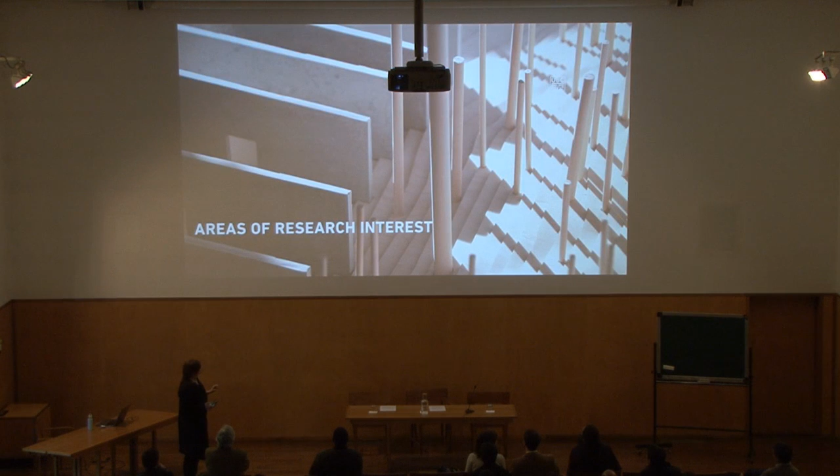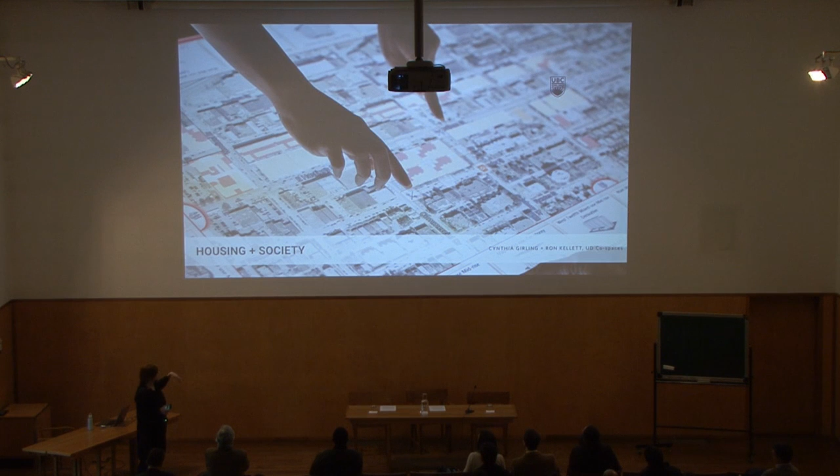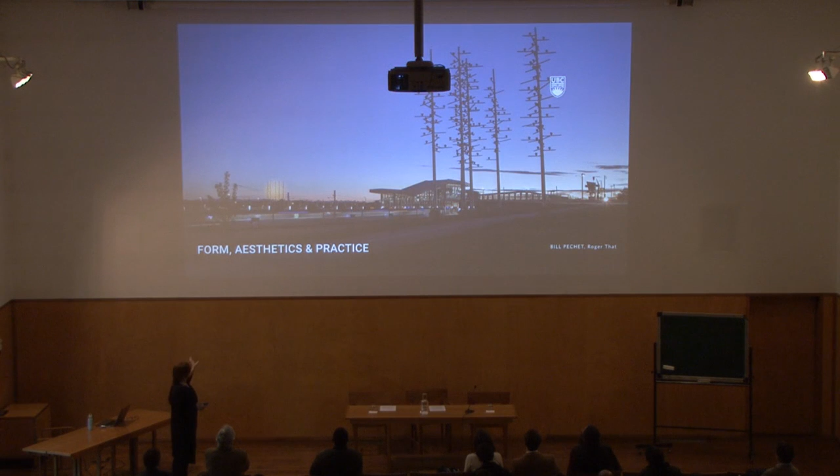Our research areas that are of interest generally are housing and society. So when we look at housing generally, and I'm sure that you guys have kind of similar research areas, it seems like. We have form, aesthetics, and practice. This is showing you an installation from Matthew Sewells, who was growing a landscape that is reversed. We have Bill Pechet, he's one of our contemporary architect artists who does a lot of public space design and installation, and he's always working around infrastructure.

And then we have design and construction futures, which is more the area that I am talking about today. This one here is a different project by Joe Dahmen, who is looking at constructing out of natural growing materials. In this case, it's a mushroom. It's a bit similar to your cork, except that in this case it's actually growing.

And then we have Blair Satterfield, who might also be interested in it. He's another one who works sometimes in wood. He's also interested in looking at waste products and how you can reuse those waste products. So his view on the wood in this research was about how to reuse the wood that comes from houses that decay down. And so right here, he's looking at a process of fabricating that zippers the wood into different types of shapes.

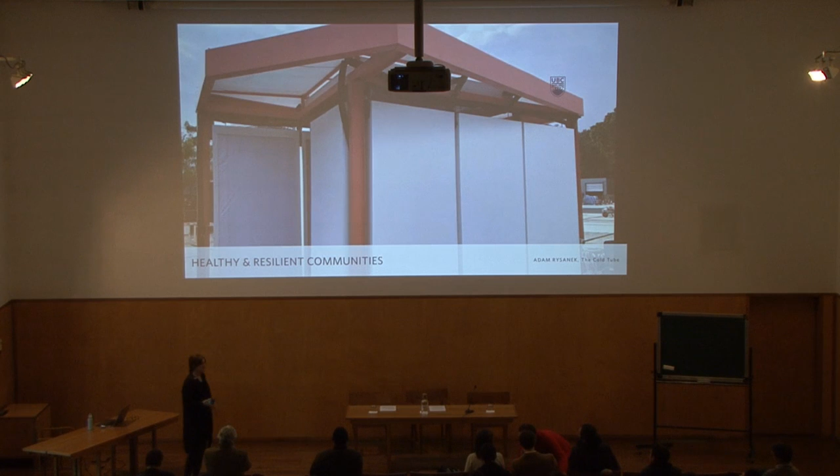And then we have healthy and resilient communities. Adam Rysanek that this is looking at more environmental controls. His research here is looking at radiant cooling through running cool pipes through walls. So you don't have to use air conditioning, you can reduce energy use by running cold water through walls and having the radiant cooling affect the space. So that might also be relevant where it's hot. Not so relevant in Vancouver, but he was working in Singapore at ETH prior to that.

We also have Kees Lokman, who's looking more at living breakwaters and dealing with water control with climate change through natural processes in landscape. And he's from our landscape architecture side.

So generally, when we look at how we go about doing this work, we focus a lot on collaboration. So we have a lot of collaboration with other faculties and other parts of the school, which I think is relatively suitable for architecture and environmental design schools. And then we have collaboration in terms of landscape and architecture, where we even offer a dual degree where you can do a master's in architecture and a master's in landscape architecture together.

So, is this working? It's not that we can. Yeah, now it's working. Okay. Can you hear me now?

Okay. So the collaboration is, we collaborate outside in other disciplines, but also within our school, we have the architecture and landscape architecture together. And so this is a project that is being done by both students, both working together.

We also have a lot of community, we work in the community. This is an installation of our undergraduate students. They created a big board and everyone gets to go and put on sushi costumes and lie on the board as a kind of fun public installation. It was a competition that they won for the local festival. And so that was fun.

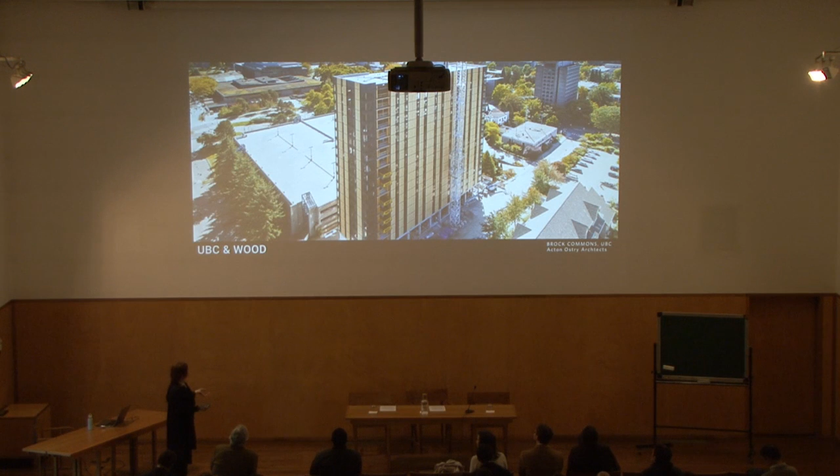This building was built to prove that it could be done, and it was built very quickly and very inexpensively to make the case that you can build these buildings in wood. For this building, we didn't challenge the codes because we wanted to do it quickly. So in the future, when the codes evolve a little bit more, there'll be more aspects of the building that could be wood, right? The core, and you could expose more of the interior wood. Right now, it's mostly covered with drywall.

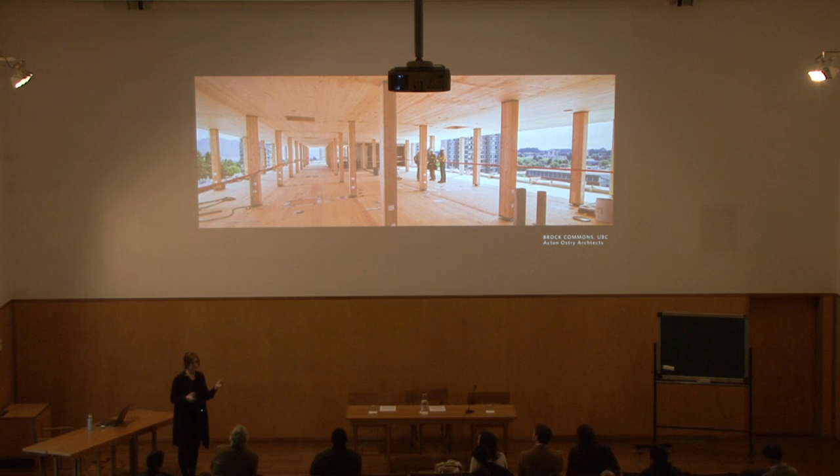So our codes are, I think, more suited to building in wood, but in terms of these tall wood buildings, it's still experimental. And so we are doing it at the university as an experiment. Now that we've proven that it can be done, it can be taken elsewhere in Canada and also in the city. Right now, the limit on wood buildings is 6 stories in Canada. And that's mostly light wood frame, if you're familiar with the light wood frame system.

So in our region, there's a long history of building in wood, especially in architecture, looking at regionalism and modernism, if you're familiar with that movement. The idea was that they were modernists building in specific regions. One of our most famous architects who built in this style was Arthur Erickson.

It's 5 degrees in the winter in this area and then maybe 25 degrees in the summer. The code does not allow this anymore, but this is kind of the history of architecture in our region. And so nowadays we have more innovative work going on in this region probably than any other region in Canada.

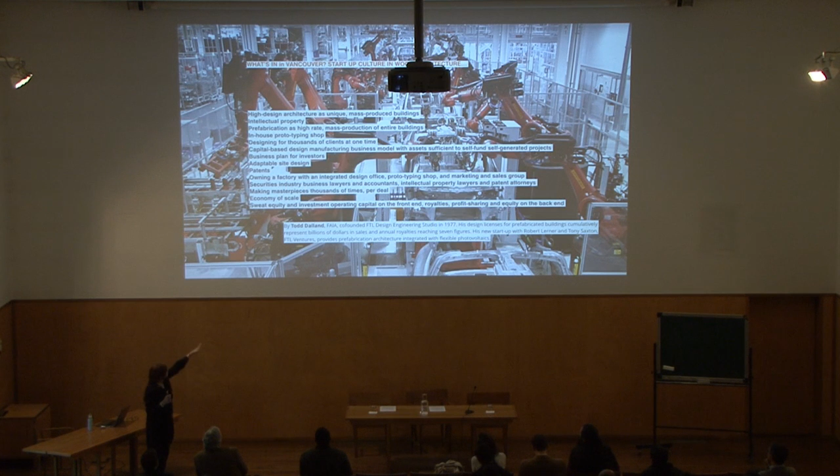But when you look at Todd Dalland, and he's looking at what is hip now in architecture, it is this kind of prefabrication, designing mass housing, owning a factory, integrated design office, prototyping shop, and marketing and sales, securities, industry, business, lawyers, and accountants, intellectual property, and patents. This is all integrated because you're designing the whole fabrication system. So this is, as I say, what seems to be up and coming in Vancouver.

Also in Toronto, if you've heard of this project, this is Google's Sidewalk Labs. It's an extremely high profile project in Canada. It's highly contested because of the privacy issues. But what they're proposing is that all of their housing will be prefabricated and more efficient. So the same idea as we saw previously, they're going to integrate the whole supply chain and make their prefabricated units and plug them in, and therefore housing is going to be cheaper and more affordable.

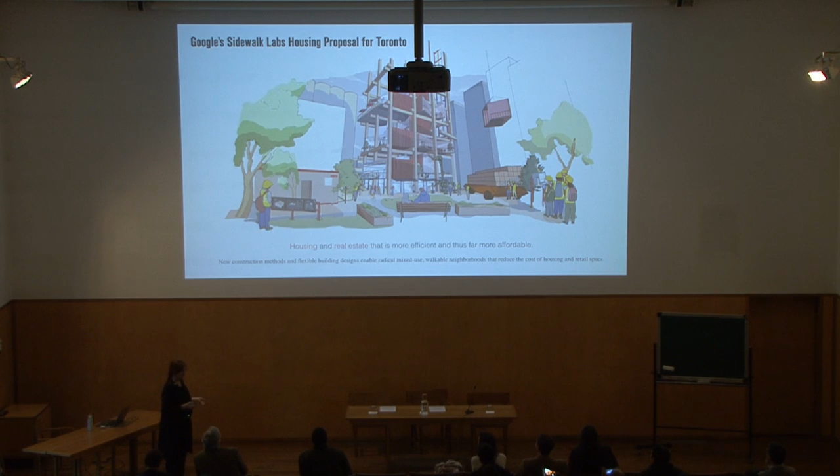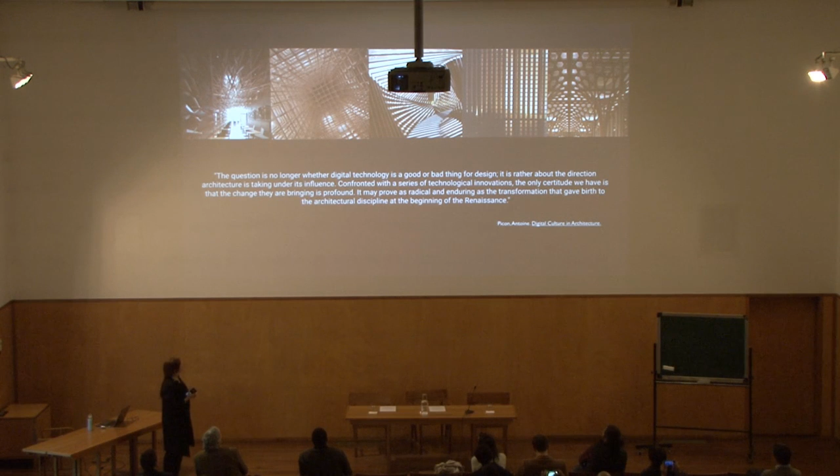So that brings us to this statement here. The question is no longer whether digital technology is a good or a bad thing for design. It is rather about the direction architecture is taking under its influence. Confronted with a series of technological innovations, the only certitude we have is that the change that they are bringing is profound. It may prove as radical and enduring as the transformation that gave birth to the architectural discipline at the beginning of the Renaissance.

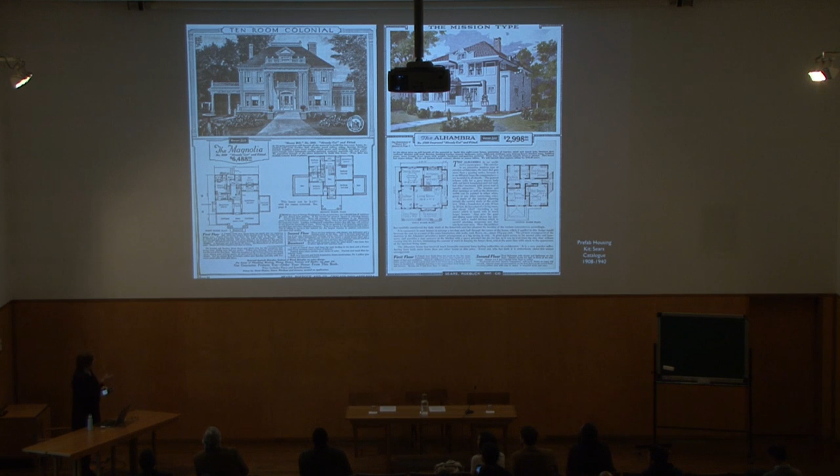And so my question in terms of what is happening is what kind of change this is bringing, and whether or not it will bring the utopian ideals to architecture. These are prefabricated houses that they sold in North America in 1908. So in the early stages of the 20th century, these were very popular because they didn't have enough labor. So they would ship the entire house, it was all wood, to site and build it on site. So this is not a new concept, but it went out of fashion because after World War II, labor came back to the country, and so they had labor and didn't need it. This was more for the settlers who came to Canada in the first place.

But when we think about what prefabricated housing could be now, we have a kind of robotic assembly process, and we have this idea that this technology is now going to influence what's going to happen in architecture. And so I think it's worth considering what that means for architecture and what that means for how architects operate.

The other thing that we might want to consider is the environment. So one of the other pressing issues that we need to deal with is the materials we use in the building and how sustainable those materials are. And that's where wood has a very large advantage because it's a renewable building material. So you replant a tree with the new seedlings, and in 50 to 100 years, you'll have another tree available for consumption. This is really key, and this can be sustainable if you do it with sustainable forest management practices. If you just take down every tree, that's not a sustainable practice. But if you replant the trees, then it's almost like you're farming trees. You keep using the material.

So in Canada, we have zero rate of deforestation right now. Anything that we harvest for trees, we replant. And this has been constant for several years.

We also, 94% of our forests are owned publicly, so they're owned by the government. And so the government has control over who can harvest, when, and how much can be harvested, and that they have to be replanted. So that gives us an ability to kind of think very long-term about how we're using the wood and how the forest is being harvested. And we say less than 1% of the amount of the forest in Canada is harvested every year and replanted.

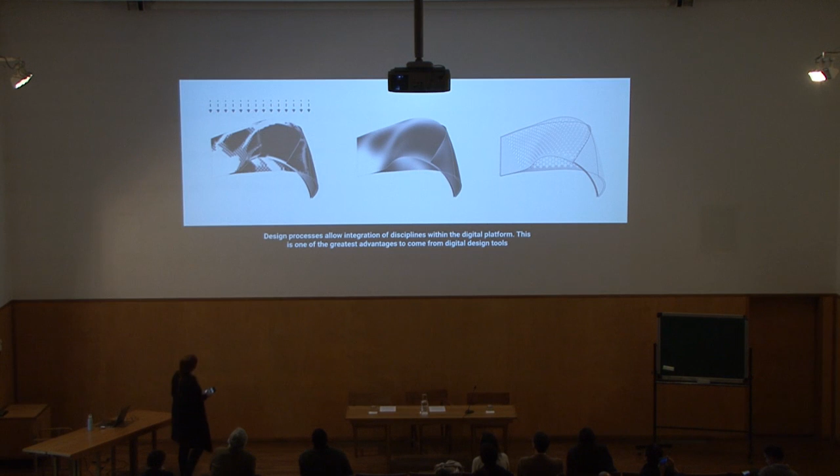So one of the greatest advantages of these digital tools is that we allow the integration of the disciplines to come together within the digital platform. And I think this is a really significant aspect. And that means that, and this is a quotation, the connection of digital fabrication and computation enables the immediate programming of production data and directly links the design with the making of architecture. As a result, the architect can fully control the construction process down to the smallest detail.

So this changes the role of what an architect does and who's fabricating, right? So when we think about it, we're drawing details, right? We're thinking about those details. In the case of these, we're also making the detail, right? If you are actually controlling the fabrication process, you are actually not just drawing anymore as an architect, you're actually building. So that means that it changes this kind of historic relationship we have with drawing, right? Especially when you're the one who is operating these systems.

So we have this kind of computer-aided design, finite element analysis, and computer-aided manufacturing that are now all playing a role in architecture. And I'm not talking too much about this in this lecture, but the analysis, when you have these very advanced tools, and I'd say that we're coming along in architecture, we haven't quite got there yet. But Grasshopper has an integration of environmental analysis and structural analysis coming within it. And so when we can integrate fully all these processes, then you collapse the disciplines, right? Then the disciplines all are working on the same software.

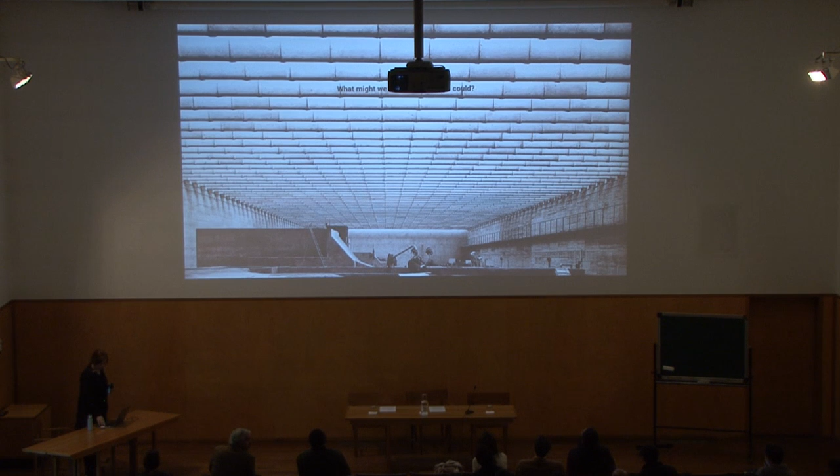And here's another project that we might think about with wood. What would this be like? This is a Toyo Ito Kakamigahara, excuse me if I pronounced that wrong, funeral home. It's kind of this undulating surface, this shell surface. But one of the interesting things to note about this is that this was originally built out of wood first. So in order to form the concrete, you had to build the wood structure. So my question is then, why would we build the concrete? Why don't we just build it out of wood? And so this is the formwork for that particular structure.

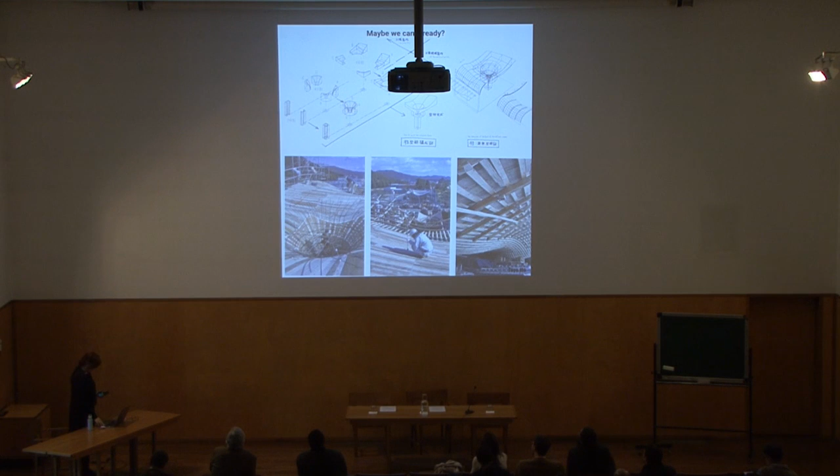So we have a group at UBC called the Wood Design Chair. It's a group of faculties, including the School of Architecture and Landscape Architecture, Wood Science, Civil Engineering, and the Center of Advanced Wood Processing. And we are together in this group that is the Wood Design Chair.

This particular research that I'm going to explain to you right now is done by myself, Ian McDonald, who was at Center of Advanced Wood Processing, Oliver Neumann at School of Architecture, Thomas Tannert, who's cross-appointed in Civil and Wood Science, and then our fantastic students who have now graduated.

And so the three kind of interesting forms that we're interested in looking at were all surface structures. So the idea of a surface to be the expression as well as the structure. And we looked at the folded plate, the ruled surface/lapped planes, and the double curved surfaces. So this was proof of concept research.

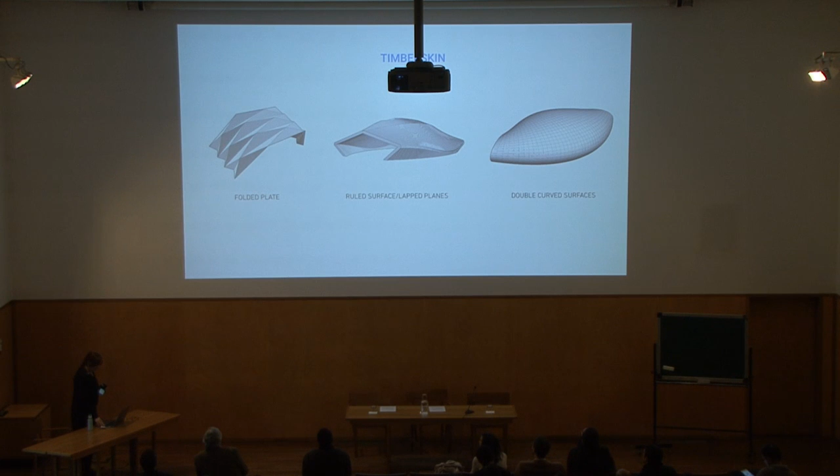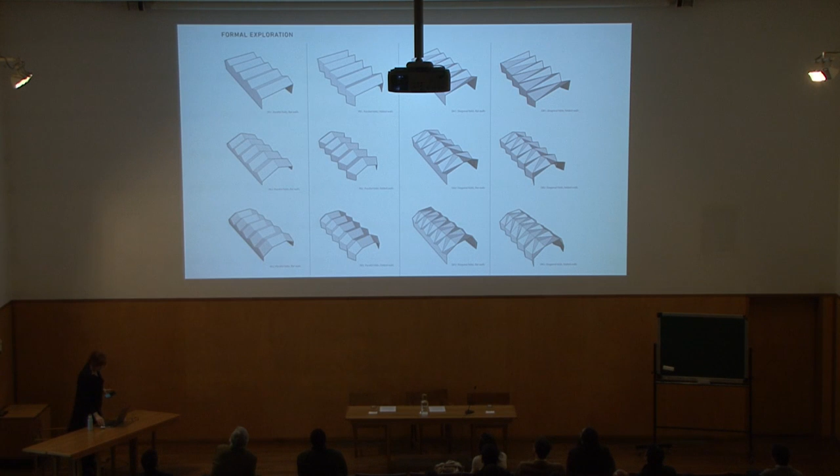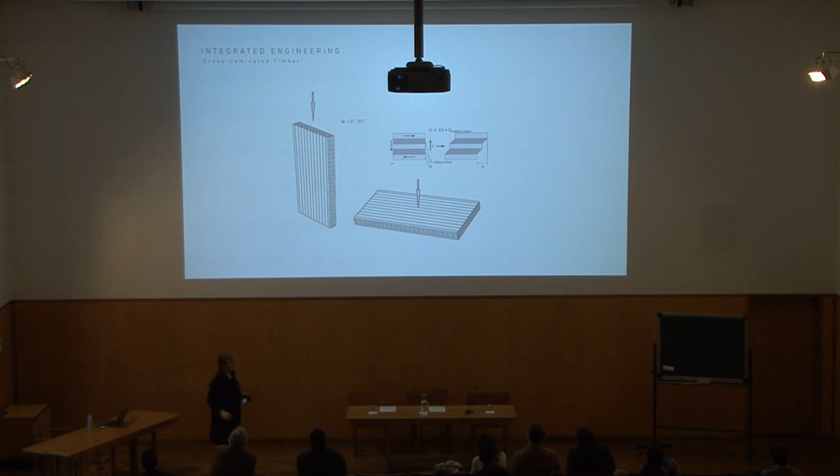And the material that we were looking at was our cross-laminated timber material. This is our engineer looking at it. We understand what the loading condition is in this case, and in this case, and what happens if we then change the loading to the form that we're interested in looking at.

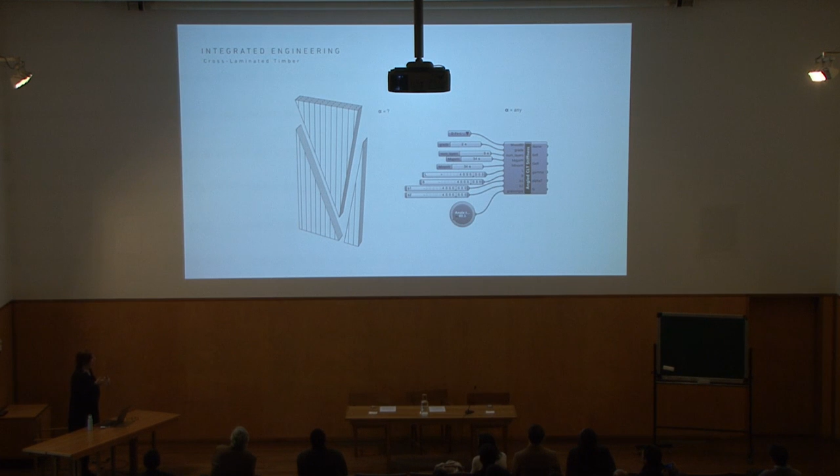So we cut our element, and this is an integrated process with Grasshopper. So what she was doing was trying to integrate the structural analysis with Grasshopper. And so the angles of the plates could then be taken to that.

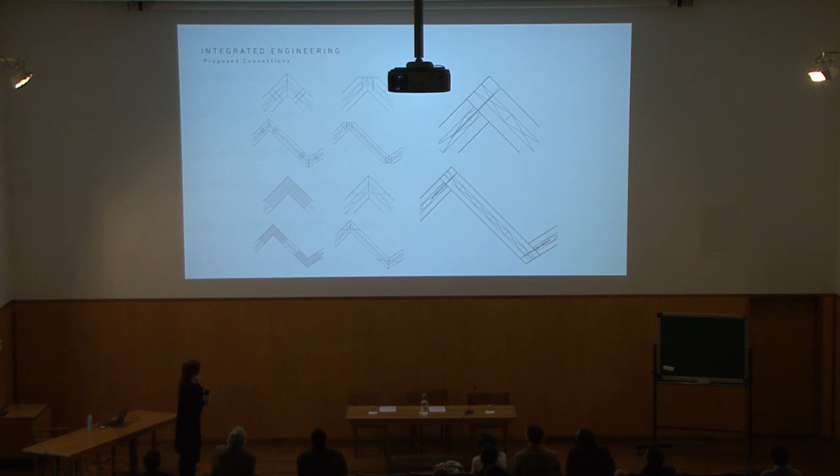And then we have the joints. So obviously, when you're looking at these kind of complex wood structures, one of the key aspects is how do you make the joint? So there are several investigations of how you could make the joint in these structures. In our case, we settled on the third joint here, which is self-tapping screws going diagonally into our elements.

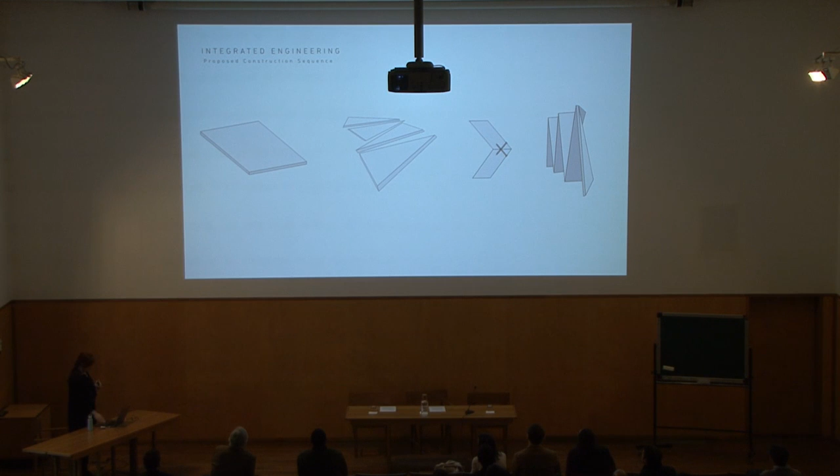So when you're looking at how these elements place together, what you want is some kind of notch that gives you the instructions for the fabrication within the actual build form itself, which is an emerging research area. When you actually use a robot, you can embed the instructions for fabrication within the pieces themselves so that they go together a lot faster. So that was something we learned from this particular installation.

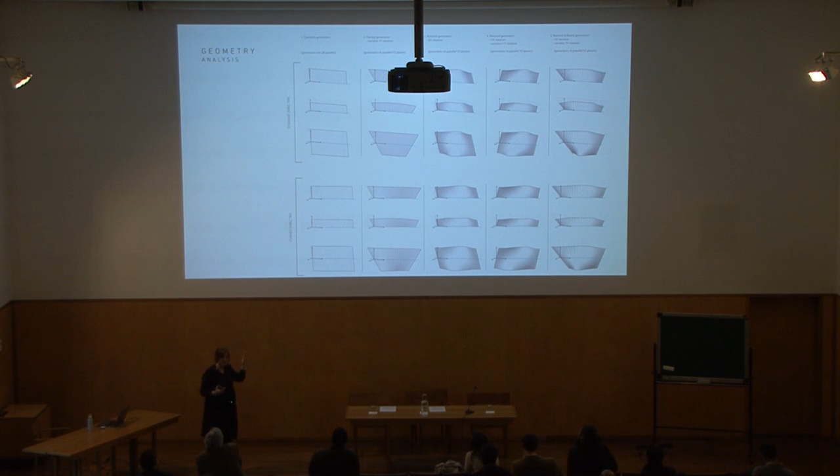But then you can use geometric complexity to change the angle of those plates relative to each other. So as you move that angle of what we call the directrix, then you allow more interesting forms that open up and are more steeply curved at the bottom. And so not only are you controlling this particular angle, but you're also controlling that angle. And you'd think, what can you do with a flat plate? But it turns out you can do a lot of things with a flat plate that we don't currently think of, because we usually think hierarchically about wood. So this started to get into the idea of what else can you do now.

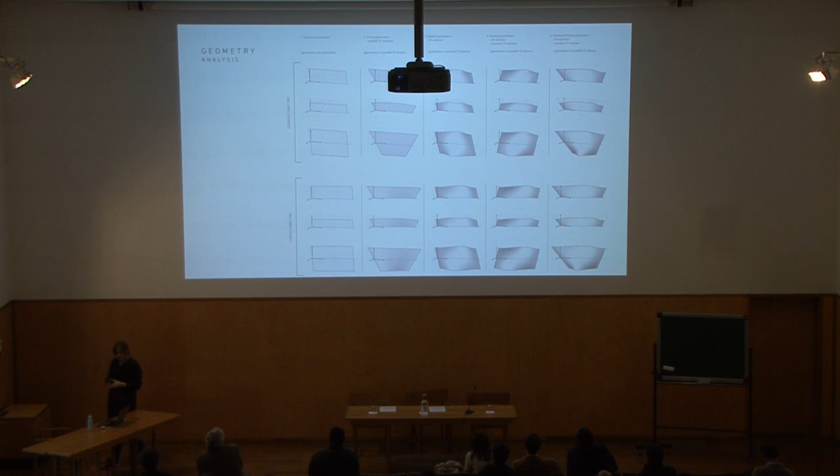We did this research before we had our industrial robot, but you can also angle the edges of those plates, right? And you can start to think about how you might make a more smooth surface just through cutting your plates at specific angles. So I think it opens up a bunch of questions really about what else you could do. I'm sure if you already use parametrics, you realize that as soon as you add one complexity and then another complexity, it very quickly gets out of control. So you have to try and limit the amount of complexity you add.

But here we can see one generating plan curve, right? So that means they have a plan curve on the base, and this is two generating plan curves. So we have a curve up here and a curve down here. And then you can have multiple generating plan curves as well. But architects might have an opinion about this, right? Because at some point it becomes chaotic. But anyways, all this is meant to do is to look at what the possibilities are. And it seems like there are a lot of possibilities. So that's exciting.

The third one, which I think we took the furthest of all of them, was the double curved surface. So this one here, when you think about how we're going to make this, there's a potential for machining something into a curve, right? You take a big block and you cut some part of it away. But I don't think that's very interesting because you waste a lot of material.

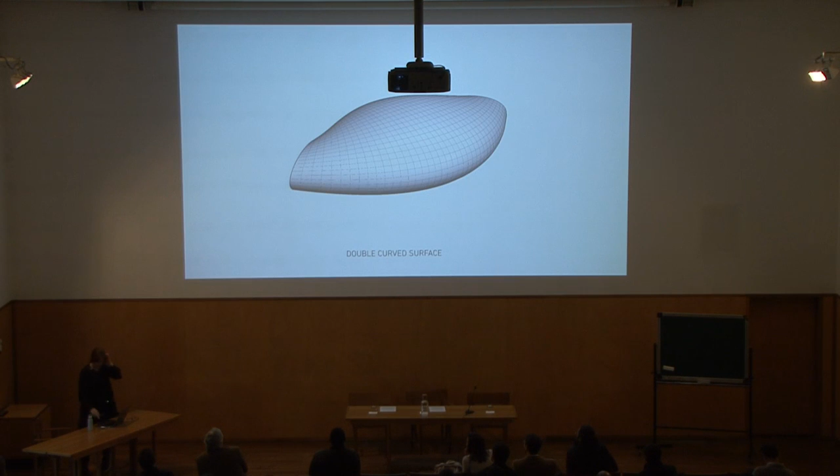So you're cutting out a lot of wood, and yes, we can recycle it and make it into MDF or whatever. But it seems like it would be more clever if we could get it to follow the curve of the actual structure. And so that was the attempt in this research, to say, how could we make this out of wood? Well, it turns out that they already make curves out of wood in the form of a barrel, which probably you guys make more barrels than we do.

So I don't need to tell you how to make a barrel probably, but anyways, just in case you guys are not making barrels, this is how you do it. So you take a piece of wood and you cut it. They probably in the wineries don't cut it with a 3-axis machine, but you can cut it with a 3-axis machine or a 5-axis machine. It turns out you need a 5-axis machine.

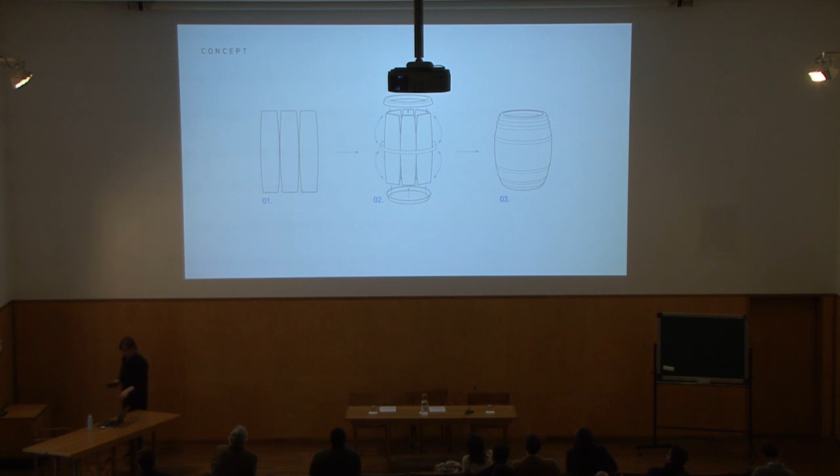But so here's your pieces that you're making it out of, and in the case of a barrel, then they put tension ties in steel, right? So that's the principle of how it goes. And then what we're interested in doing is making double curved CLT. So that was the fun we were having. And so we basically take the barrel shape and we apply it to a large structure. And to do that, we need to cut our pieces of wood at a very specific shape.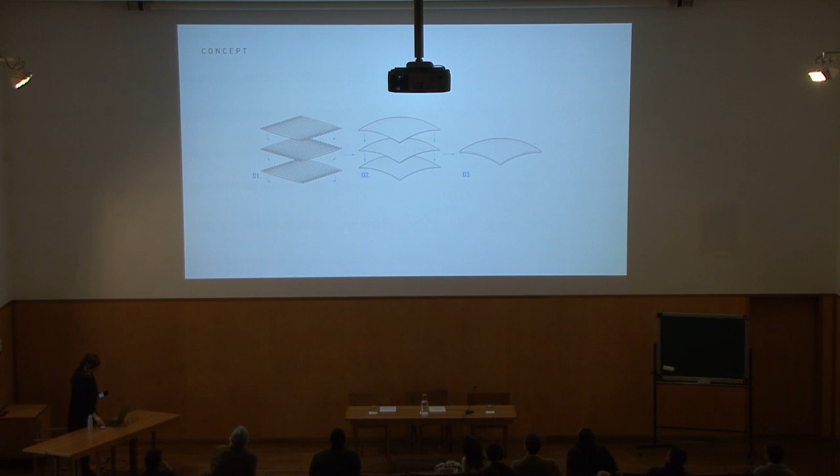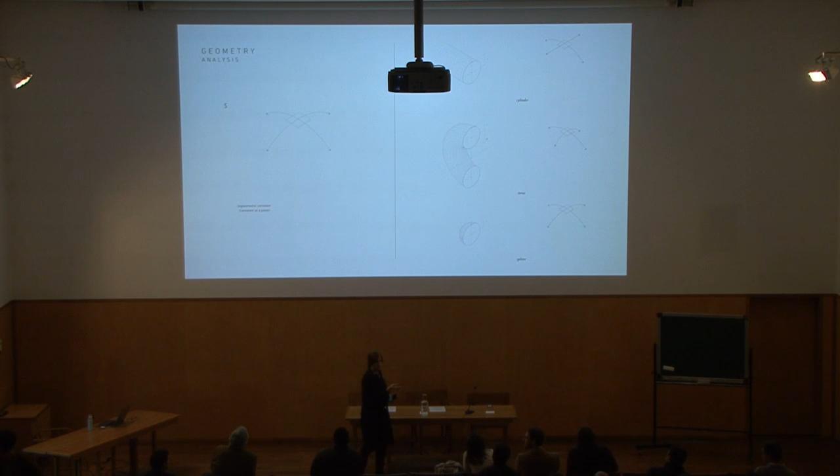So the shape that we cut them at depends on the global geometry of the project. So here, we're analyzing the geometry. So if we have a cylinder, for example, here, we have a curvature in one direction, right? And when we look at the torus, we have a curvature in one direction and a different curvature in the other direction. And when we look at the sphere, we have a similar curvature in the two directions. So those are the kind of the basic geometries that we're interested in looking at.

Now, what we're doing here is using the elastic bending radius of the wood. So wood bends, right? And you can bend it within what we call the elastic bending. Does anyone know what I'm talking about when I talk about the elastic bending radius? No? So I can bend wood without failing it, right? To a certain extent. That amount of bending depends on how thin it is. If it's very thin, it bends a lot. If it's thicker, it bends less.

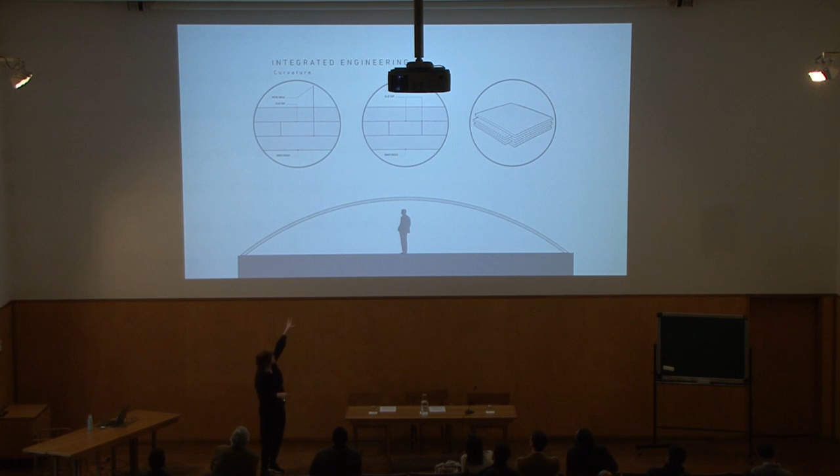And I can still use the wood because it's still working structurally if I bend it within its natural bending radius. So as I want to have a larger structure, right, I can use thicker members because it bends less. And if I want to have a tighter structure right here, I use a thinner member because I can make it bend more. And so we can adjust or tune the thicknesses of the laminations according to how much span I want. In a building, typically you want a very large span, so you can use a thicker material. And that's the principle of this.

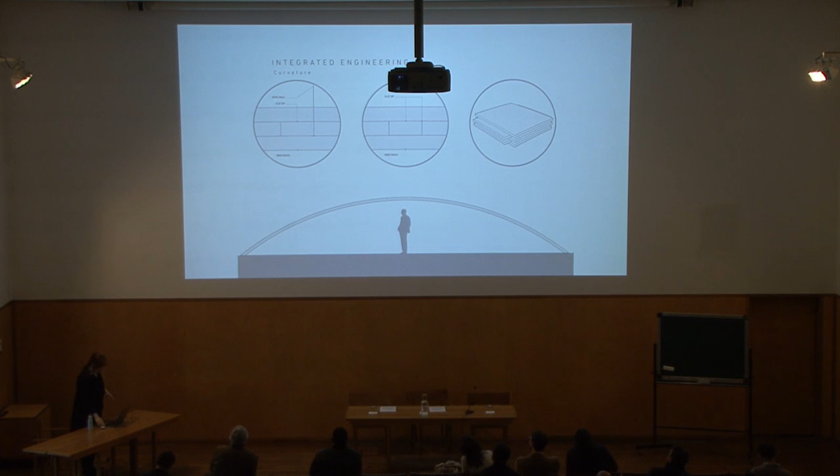So now we're making barrels, but we're making them into buildings, and then we might need to connect those pieces. So the question again becomes, how do we join these pieces? And this is not resolved, this is just a suggestion. We can maybe have some collaboration and resolve this problem, but we haven't done that yet. So there's different ways you could go about it. So our self-tapping screws, like we used in the other example and has been used by ICD in Stuttgart on several of their projects. And then we have also a lapped joint here with some crossing screws, and then an infill piece that goes across. So there are some potentials for making this connection.

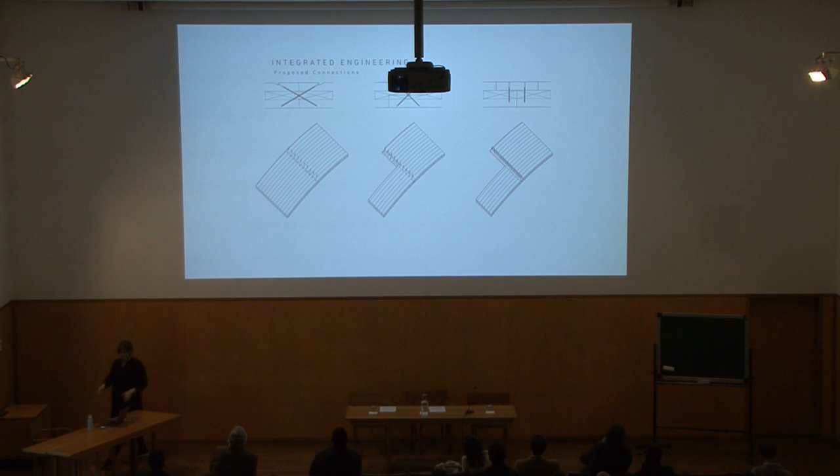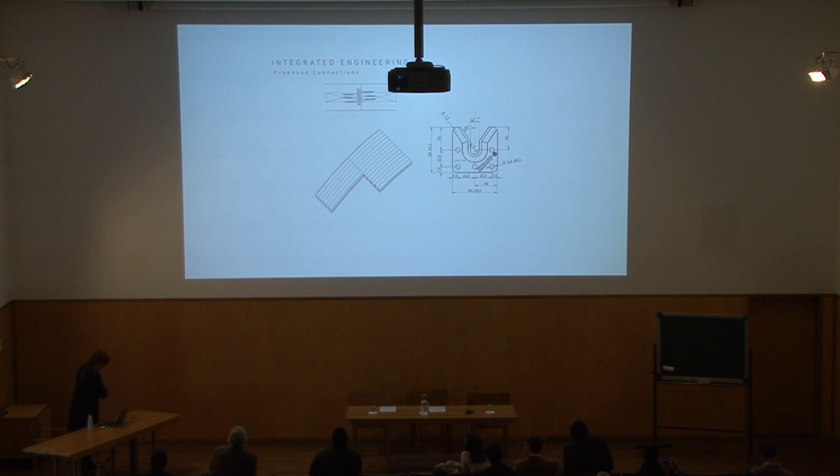This is a shell structure, so you have in-plane forces, ideally, but probably you need to design a little bit for out-of-plane. We could also do it with these Knapp connectors. They're very expensive, they're proprietary, so not as ideal in our minds. And then there's also aspects where you might be able to glue it. This is similar to the connections you see in wood whenever they're trying to connect standard lumber, and they just make a very large surface area and apply glue, and that allows you to have a stronger connection within the joint than you do with the wood itself. So there's a possibility of also doing that. Again, you can see it needs advanced machining because you have plates at angles and then other plates at angles. With a robot, it's no problem.

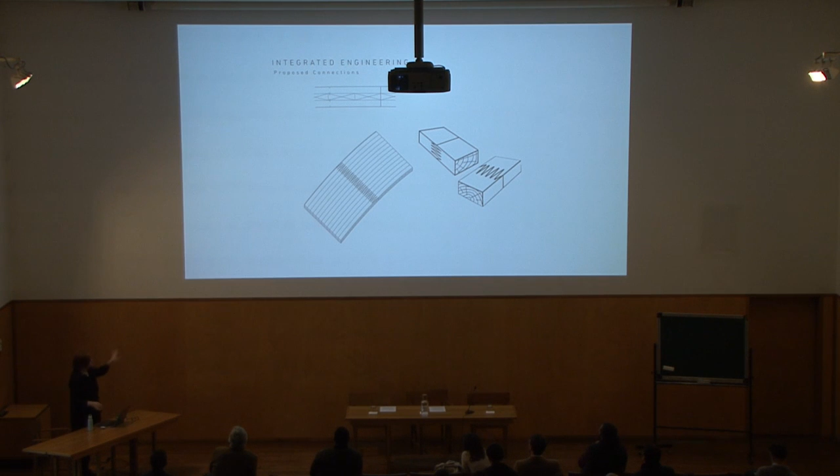So we are looking then in terms of integrating this with our engineering process. It's a relatively advanced structural engineering problem because we don't want the engineers to have too easy a time of it. So we're looking at a shell structure that has laminations in opposite directions and has several layers of them, and then we want to apply some kind of load to that and see what's going to happen.

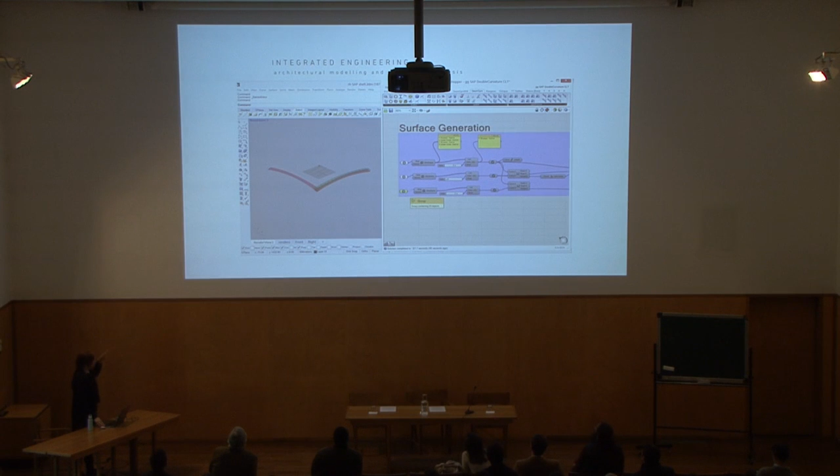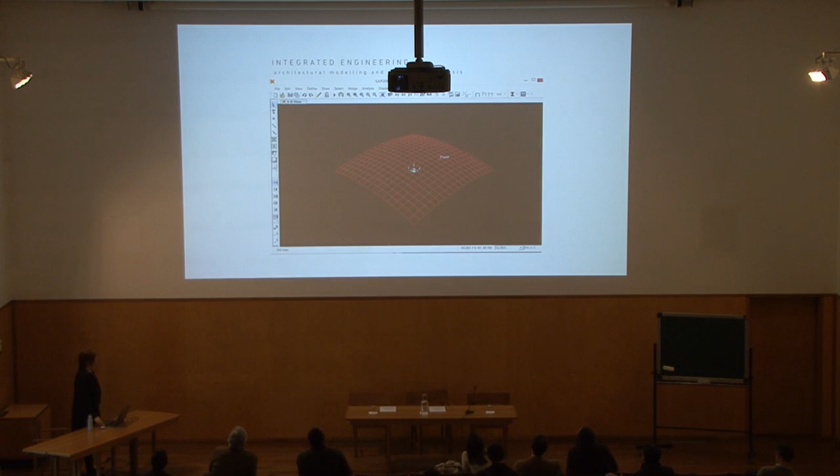So when we're looking at that, we tried to integrate this process in terms of surface generation and creating a mesh within that, and then integrating that within the engineering software, so that we have some way of moving that back and forth between the architectural and the engineering software. So you can see us making the prototype. It's still a very manual process.

We had to think about how that at first we need to make a mold, so that's our mold right here, and then we lay our laminations down and we screw them down, and then we glue on the laminations in the next direction, and you can see us laying those laminations and we clamp them. So this is the version that we did where we glued it. We also did another version where we screwed all the laminations together, and then we leave it to dry.

So then the outcome are these panels, which are double curve panels. We're interested in how much bounce back we get in the panels, how much they come off the mold. So the mold is this shape, and how much do they move up? In this case, it was very little. In the case of where we screwed it, it was higher. They did more of the bounce back in those cases.

And we tested this in terms of, in this case here, you can kind of get an idea of the curvature. So this is a 10-meter curvature. It would make a 10-meter span, but you can see I'm trying to get a picture of it so you can see the curvature, but it's not that curved because it's for a building, right? And so it's quite a large curvature.

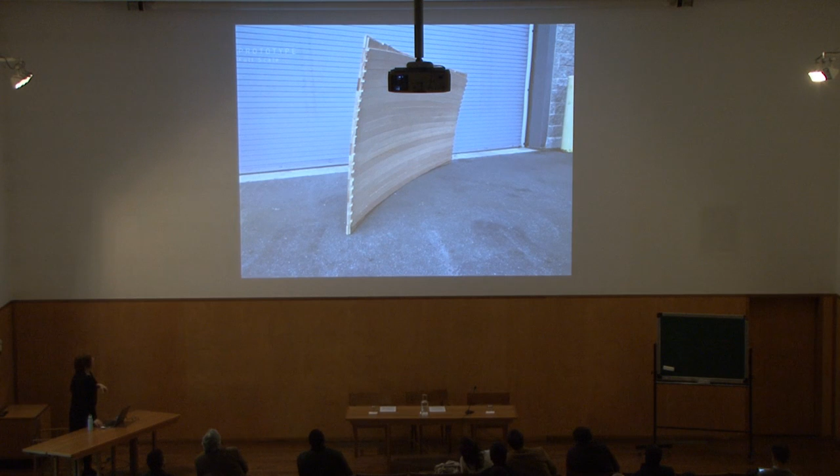So the next part that I'm interested in talking about is the idea of what's happening with robotics. As we started to push the envelope and look at the geometry of the wood, we started to come up against this challenge that we didn't have enough axes, right? We wanted to make angles that we couldn't make. We wanted to connect pieces that were more freeform.

So one of the potentials or the promises of robotic fabrication is that we can go back to the traditional joints, where we've lost the technology, as Anna was talking about. In Portugal, you lost the ability to make wood architecture, but also in Japan, although they still have some traditional joinery knowledge there. China completely lost all of their wood fabrication knowledge. And so these types of highly crafted joints are now once again possible whenever you have this advanced machining.

There are, of course, aspects: if you use the robot, you know that you can't make a square cut like that. Those would have to be round, because your bit that's moving in the machine is round. So they're not going to be the same, but it is potentially interesting to make a wood-to-wood connection again. Previously, when we deal with wood and connections, we always add steel, right? We need to make a connection in wood, so you put them together and you put some steel in there. But that's not very sophisticated. This is much more sophisticated.

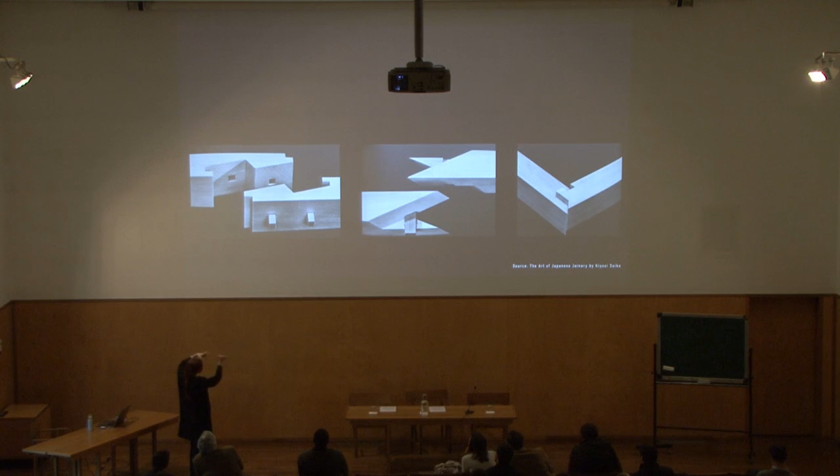And embedded within these is the ability to change angles and take different types of loading. So when you put this together and start to pull on this, it's a tension connection, right? I put these two pieces of wood together and it can slide this way, but it can't slide this way anymore, and it can't slide that way. Also this one here, you put them together and then you put the pin in this way, and again you have this connection that can't slide this way, can't slide that way, and also can't pull apart.

This one here is more of a connection that you can slide in this way, but you can't pull it out like this. And so each joint is very specific to the forces that are on it. And that's, to me, a very interesting architectural question. No longer do we have this dumb plate that we're putting pieces of wood together with, but potentially now we can put pieces of wood together in a much more sophisticated way. So we apply our robot, and then we have very interesting outcomes.

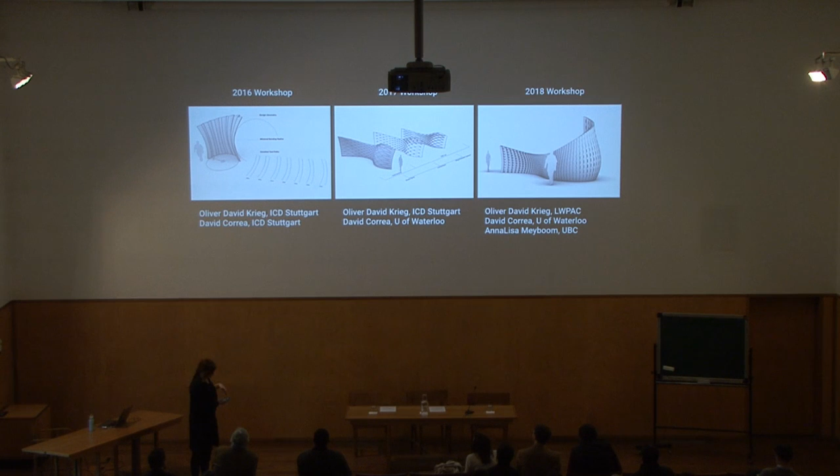And that brings me to the last thing that I wanted to talk about, which is the robotic fabrication of wood and what you can possibly do with that. This has been an area that I've been looking at in my studios for my architecture students for the last 3 years. And with those studios, I've been doing workshops. At first we invited the Institute for Computational Design to come and do the workshops, and now the people we were working with there have graduated from those positions, and they're all working in Canada. Oliver is now in Vancouver, David is at University of Waterloo, and I'm at UBC. So this year, it was just hosted at UBC. These are the projects that we did in the last 3 years.

What I like to do is get my students to go through this process, because it helps them understand what we call the machine space. It was very interesting. I started the studio this year, and we always have this idea that students don't understand the materials they're working with, and they don't understand the machining processes. But when I started my studio, my students were assuming that they needed to make the wood go like this. All those things you see out there, you have the wood, and it's all in a line, right? They have different forms, but they've cut the plate into different shapes, and they've stacked it all together.

And I'm like, this is very interesting, because it's not using all the axes, the 5-axis or the 6-axis or the 7-axis or the 8-axis that we have. It's only using 3 axes, and it's using flat plates, which meant to me the students had internalized the material and the fabrication processes that were readily available to them.

So then I had to break the students' mindset of having only those 3 axes, right? That you can move in the 4th axis, and you can kind of change the shape of the material. So I would no longer say that the students do not have an idea of what they're building or what their materials or their technologies are. I think, in fact, we do internalize the tools and the material that we actually work with.

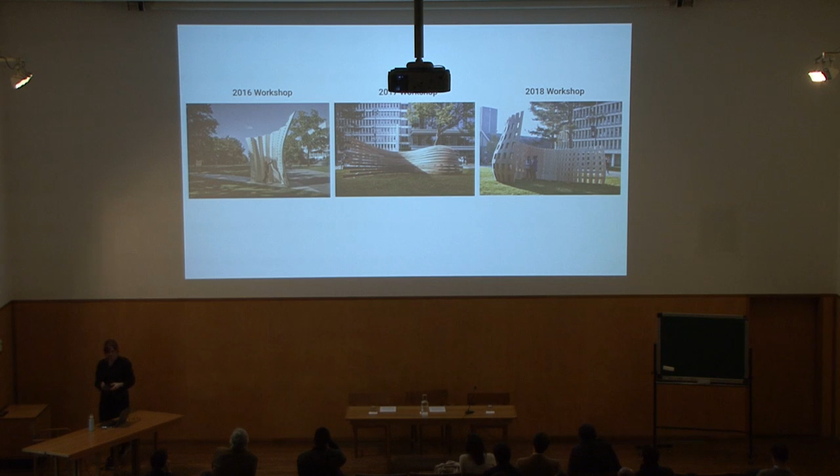But in my mind, that's only a matter of time, because once you can create custom engineered wood products, then you can start to make your own wood product as you desire, right? But we won't talk about that today. So these are the installations that have been done in the past, and I'm going to talk about the third one, which is what we call the double layered stressed skin structure.

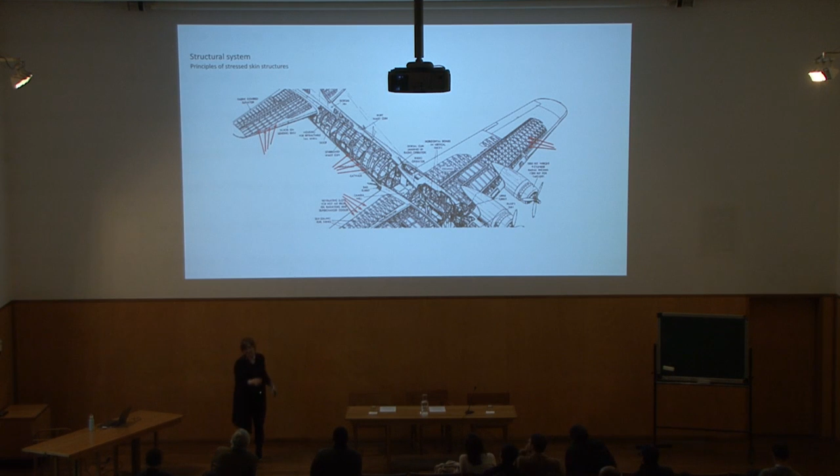And so, as we did when we were looking at the barrel structures, at the structures with the double curved CLT, in order to do that, we need a thin layer of wood to get the curvature that we want. So we don't have the option of making a big piece of wood, because we have to make it curved, right? So we certainly need a certain thinness to curve it. So how do you make a curved structure out of a thin material?

The problem is, if you do that in wood, you have a curve, but if you need to make the curve, you also need it to bend enough, so it's not strong enough to make the structure. So then the question is, how do you create some depth, some strength within that element? And what we're looking for is depth, right, in order to be able to span.

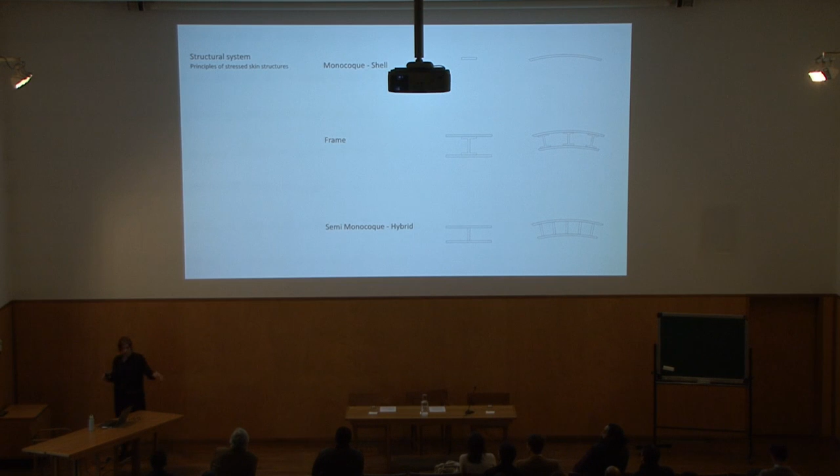So we have a top surface and a bottom surface that act as the flanges, and then the webs are the vertical elements that are going in between. So we have a working bending member made of smaller structures that are all thin. So we thought, this is great. This is going to really give us some capability of bending. So this is what the structure is.

This is the Grasshopper model, so it doesn't have any depth to it. But you can see what's happening here is we have these multiple layers of elements that are lapping each other. And then we have the webs that are going in this direction. So we have the two flanges, and then we have the webs in this direction. And they lap each other and connect with these tabs.

So that's kind of the principle. And then in terms of structures, we're looking for something that will take some bending, right? And when we're looking at more the engineering side of it, when we take some element that's bending and we load it, then we have the base that's going into tension and the top that's going into compression. And so what we're looking for is something that will mostly take the forces in the tension and the compression and hold that planar.

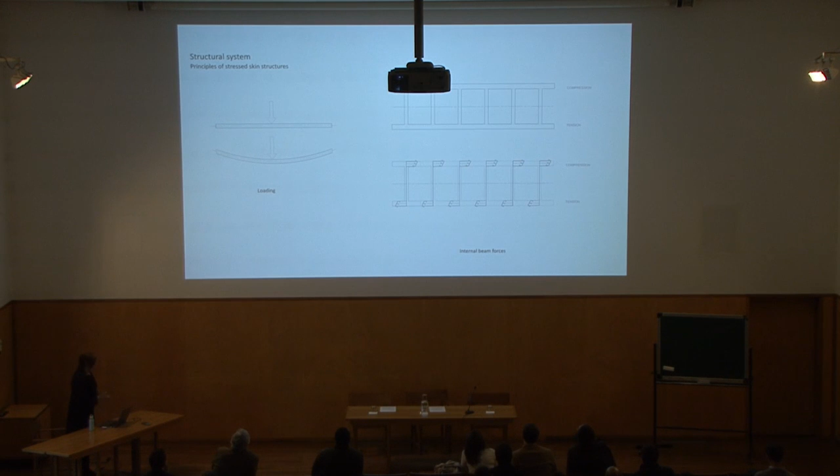So the web is holding it planar and the flanges are taking the forces. So those are the two. We've put the material exactly where you need it to take those maximum forces. And then when we look at these, this is what our structure is doing: we're looking at a whole bunch of webs and flanges, and the whole thing is working together, and that way we can use many small elements instead of one large element, which is what we're looking for here.

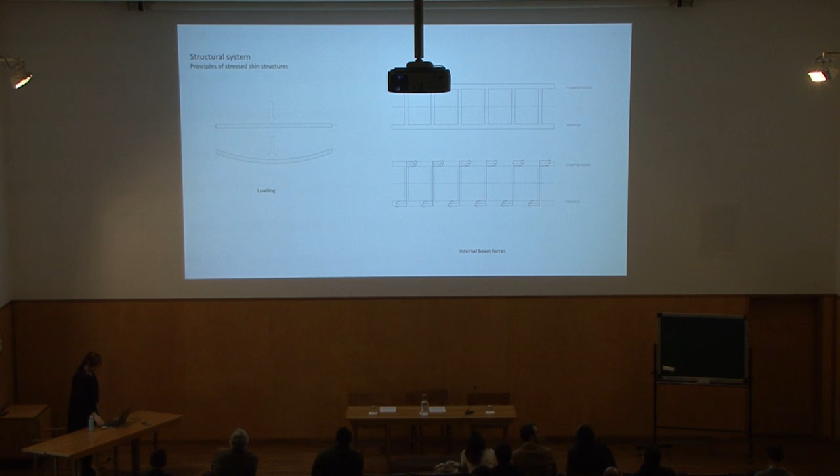So when we look at the rigid single curvature in this direction, what we need is something that's going to make the double curvature. We can make single curvature, but we're more interested in double curvature because it's harder, right? So in this direction we can cut plate to make that shape. In the other direction, we have to bend it, right? And that's what the tabs are doing for us. The tabs in that lightweight plywood are actually doing the bending for us.

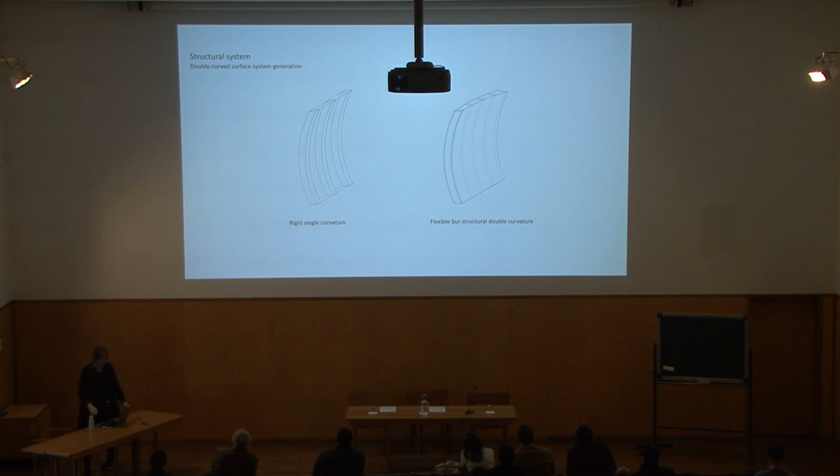So maybe I can explain it a little bit later, but this actually works with any shape of structure, so you can take a shell form, curve the shell form, duplicate the shell form, and then divide it into as many divisions as you want. This is all scriptable. So in Grasshopper, you can change the number of divisions, you can change the curvature, you can change the offset. So it's a fully modifiable structure.

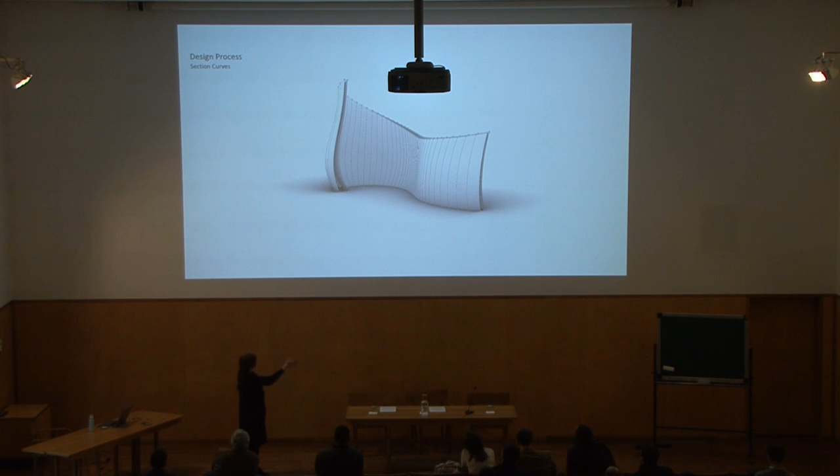Right now, these are cut with planes. We're cutting them individually with planes that go through the structure like this, perpendicular to the actual structure itself. So as we go through, we're cutting the geometry into planes. That will give us the ability to put our webs in straight. Because our webs are stiffer, they need to be in a single plane. And that's what's being identified in this part of the script.

And then we take that and we can see where our webs are going. So our webs are developed from that. And then we lap our surfaces onto that. So these surfaces are lapped, similar to the second research project that we did, where we lapped the elements to make a curve. You won't notice this as much, it's not using the principle so much, but each one of these plates is actually offset by the amount of the material so that we keep the accuracy of the model, right?

So we didn't take one plane; we took 50 planes for 50 different elements. And then each one of those planes is offset to the next one to keep the accuracy that you need, because all of this is robotically cut. So it's within millimeters accuracy. So that's what's happening there. You can see the lapping of the planes as we continue here, which changes the curvature slightly, right? Because as we saw with the other research, you can actually make a curve with that. So those are our lapping surfaces that are superimposed on our webs. And we have the information.

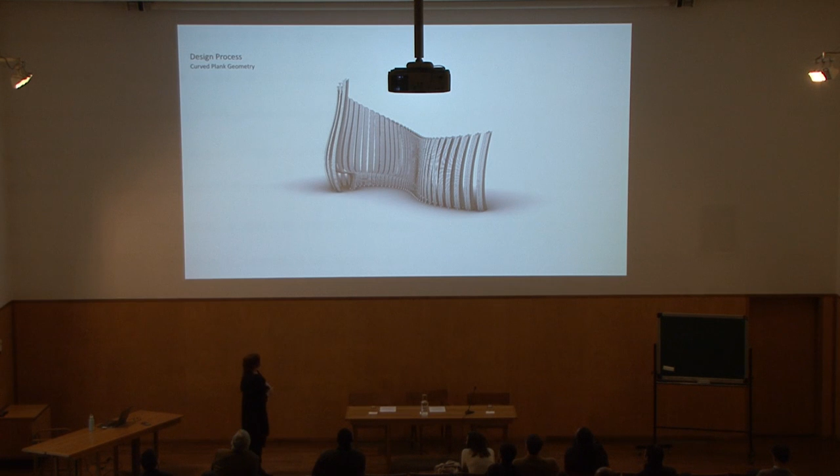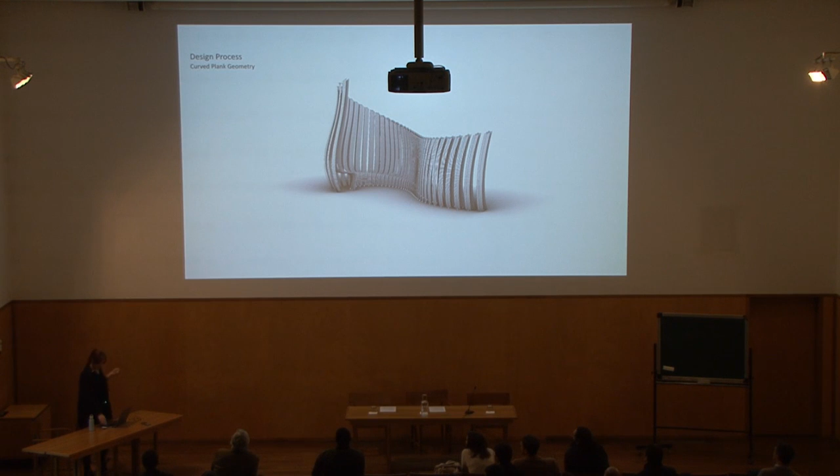So obviously there's a problem here, right? Because we have this bench. The plywood comes along, and then when it needs to make the bench, it doesn't have enough bending capacity. So we said, okay, that's fine. We're just going to kerf it, right? So in this case, we kerfed the bench. Does everyone understand what I'm talking about by kerfing? I can maybe show you a picture here.

So where we want the bench, we say, okay, I want a bench there, so I don't want to have a back, so people have to be able to sit on it. So I'm going to modify my script. So we say, in this particular area where you have this bench from the start to the finish, you're going to make an extra large tab, and then that tab is going to smooth its way back into the structure. So that's what the parametrics are doing.

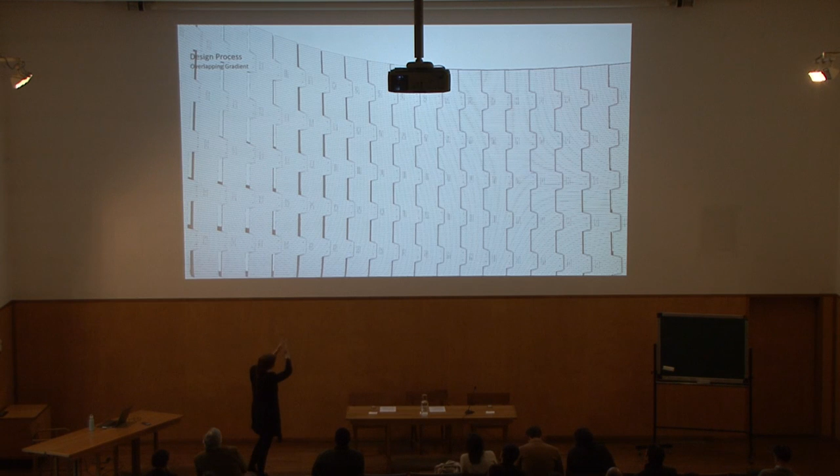We also want to keep control of the spacing between the panels. So within this script, we have these elements that are happening consistently with a consistent width, and we're cutting those out of the plywood. And then you'll see that there's a bigger gap on this side than there is on this side. On this side, it overlaps. So at certain points, you want your structure to open up, light. At certain points, you want it to close down.

So that's controlled again on a mapping function to open up the spacing between the elements at certain points and to close it down at certain points. So again, there's a complexity within this script to allow where it overlaps and where it doesn't. And in this case, we're keeping the tab spacing the same and allowing that opening to happen in different locations.

But if anyone ever tried to use the unroll function in Grasshopper, in Rhino, you'll realize that there's a limitation on that function. So when we are thinking about making the model and using the robot, to use the robot, we want to take those strips that are curved like this and we want to lay them flat, right?

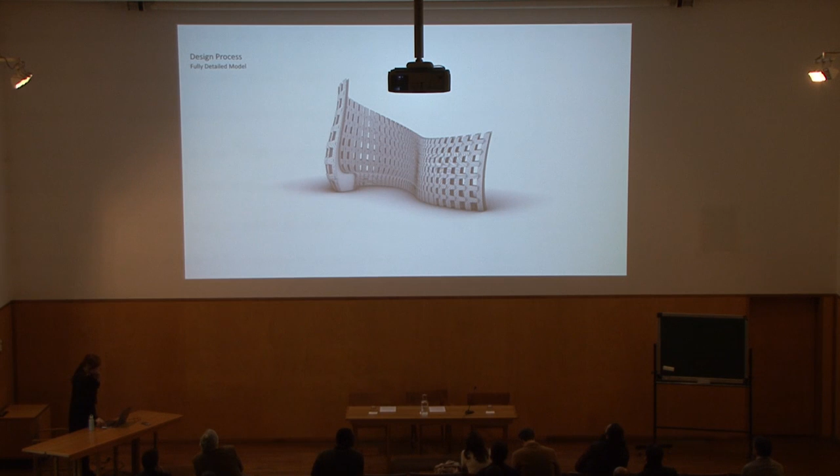So this is what it looks like when you unroll it, and that's what we cut with our robot. So then we have to put it back again. So that's what it looks like when we actually ended up building it, and the elements of the kerfing you can see there relatively. It's not very delicate kerfing, right? This could be a whole study on its own.

The reason that it's not very delicate is because we have 2 bits. We have a tool changer on our robot, and it has 2 bits. So we have a cutting bit, and we have a drilling bit. We needed the drill to do the rivet holes, and we need the cutting bit to cut the outside. So that doesn't leave us any other cutting bit that we could do the kerfing with. So when we put down the piece and we cut around the outside of it, then whenever you go to change the bit, you end up with an inaccuracy.

If you have the 2 bits that are in the tool changer, and then you decide to go back and take another one, you'd have to take it out of the robot, put the new one in, and then you'd have to figure out where the 0, 0 was on that new bit. So if we wanted to have really good kerfing, we either need another bit on our tool changer, or we would have to go through this whole process every single time we cut a panel, right? So that would take too long. So what we did was we just said, okay, we're going to have a very kind of unelegant kerf using the cutting bit. So that's why our kerfing is not as ideal.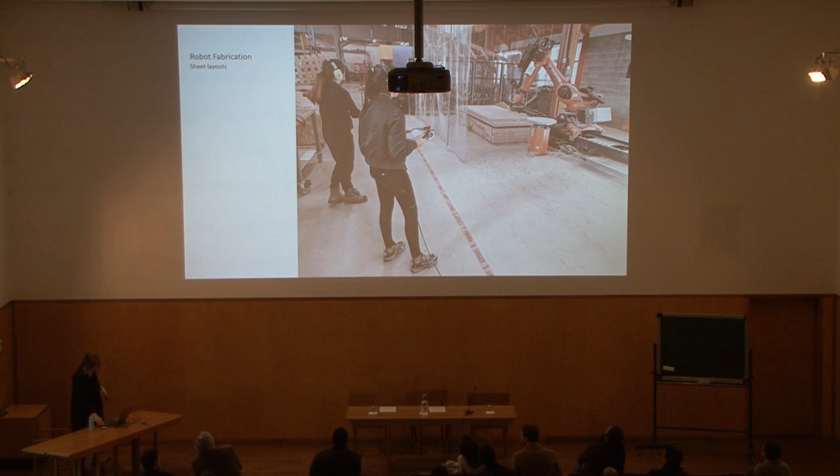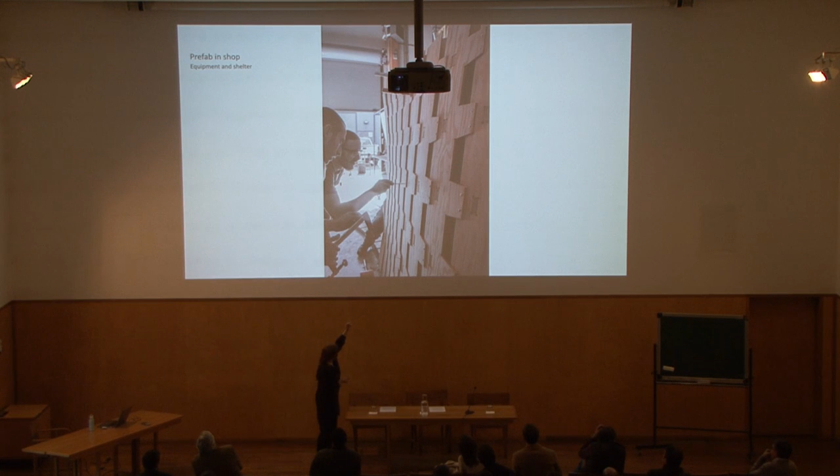When we're looking at that kind of very precise lapped structure, like this, right? You can see people, they're putting these things, they're lining up. So not only we have these tabs, right, that are going in, and then we have these rivets. So the tabs are keeping the elements straight onto those things like that. So they're positioning it like this, and the rivets are positioning like this. And so then we know how to put that on.

If we tried to measure each one of those things, can you imagine how long that would take? Because this is 2 millimeters, that's 3, that's 4, that's 5, that's 7, that's 9. So that is going to take a very long time just to measure those kind of elements. So not only does the robot give you the ability to put something together very precisely, but it also gives you the ability to cut down on the time that the laborer takes to do the work, right? And so that's a very significant cost in terms of how your construction process goes.

I know we don't talk about cost in architecture school, but trust me, you'll talk about it a lot when you get out.

So these are the three panels that we put together. You can see here, when you look at this part here, you can see the spacing of them increasing, and then we can see the spacing of them coming together and then turning the corner like that. The geometry of this structure was arranged so that it has a depth, so that it can't overturn, right? So that when the wind blows, it's not in one straight line, so it has this depth, and so it's stabilized both in this direction and also in this direction. So the overall global geometry is also participating in the structure itself.

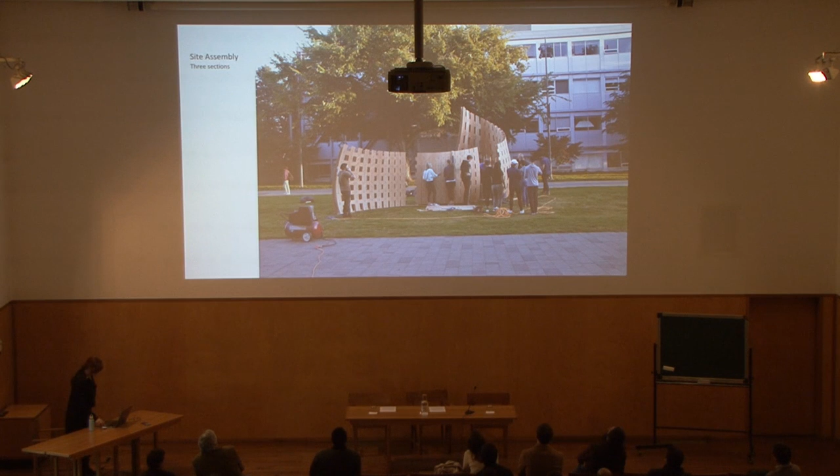And they even let us have it this year, so we got word 2 days ago that we got our funding to do this next installation. So we put it on campus, we let it sit there for a year, and then we take it down with a chainsaw and build a new one. So this will be destroyed probably in September. But if you come before that, you can see it. So please come and visit.

And it's also marine grade plywood, which is why it can sit there for so long. Because as you know, when you're trying to leave traditional wood out, it's very rainy in Vancouver, and the wood will degrade. So we use a marine grade plywood, and then also use a varnish on top of that to try and give it a little bit more longevity. But after 9 months, the last one wasn't looking so pretty anymore. It was still fine, but we're anticipating the same thing will happen in this one. So that's our final structure.

When you look at the back of it, it looks quite different. So that's the back view of the structure. Now that I've told you all about the coding, you can see the code right in the built form. Because all those gradients are lining up, you can see the way that the elements transition down the wall. So the top part is also divided in the same number as this part here. So all of the elements that are transitioning are transitioning along those tracking lines that we set up.

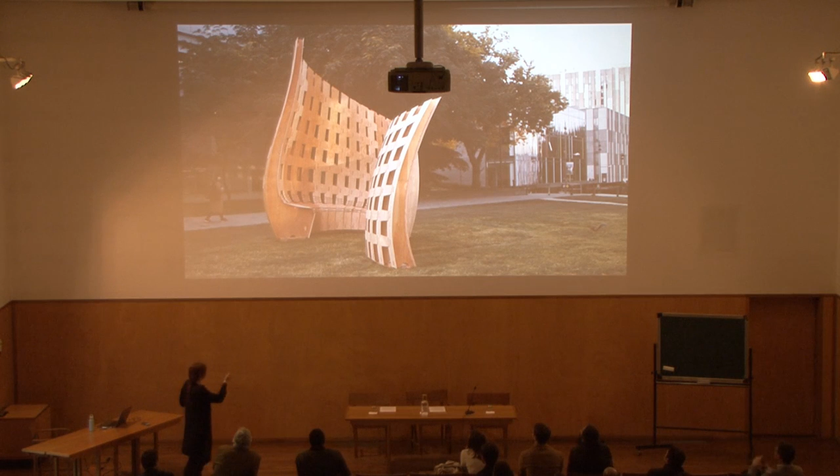And then this is the other view. So we oriented it on campus so that this is the view from when I'm walking this way, right? And the view I just showed you is from where I'm walking in the other direction. So depending on what direction you're coming from, this one is coming down this path, and this one's coming down the other path. So this is inviting you to go and have a seat.

We also have this circle at the bottom. This was me optimistically thinking that we could light it from the inside. Because the last 2 times the problem is that the lights on campus are missing the structure, right? So at night, the light is over here and the structure is here. So we got the campus landscape architect to change the lighting. And we were going to try and light it from the inside, but they couldn't get any power to the site. I don't know why, but they couldn't. So it's still potential, but it's not lit.

And there's a squirrel. We had a discussion of squirrels the other day.

All right, and that's our kerfing, as I showed you before. And then this is our very precise lapping of the structure.